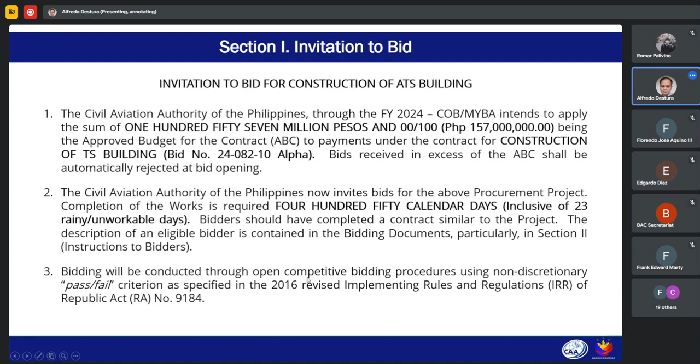Interested bidders may obtain further information from the Civil Aviation Authority of the Philippines BAC office and inspect the bidding documents at the address given below from 8 a.m. to 5 p.m., Monday to Friday. A complete set of bidding documents may be acquired by interested bidders on 16 October 2024 until the deadline of submission of bids, from the given address and websites below, and upon payment of the applicable fee for the bidding documents pursuant to the latest guidelines issued by the GPPB, in the amount of 50,000 pesos exclusive of any and all taxes imposed by relevant government agencies.

The procuring entity shall allow the bidder to present its proof of payment for the fees by presenting the official receipt in person. The Civil Aviation Authority of the Philippines will hold the pre-bid conference on October 22, 2024, 9:30 a.m. at the CAAP Conference Room, CAAP Compound, Mia Road, Ninoy Aquino Avenue, 1300 Pasay City, Metro Manila, and/or through video conferencing or webcasting via Jitsi, Zoom, or Google Meet, which shall be open to prospective bidders.

Bids must be duly received by the BAC Secretariat through manual submission at the office address as indicated, on or before November 5, 2024, 9:30 a.m. Late bids shall not be accepted. All bids must be accompanied by a bid security in any of the acceptable forms and in the amount stated in ITB Clause 15. Bid opening shall be on November 5, 2024 at 9:30 a.m. at the given address below and/or via Jitsi, Zoom, Google Meet.

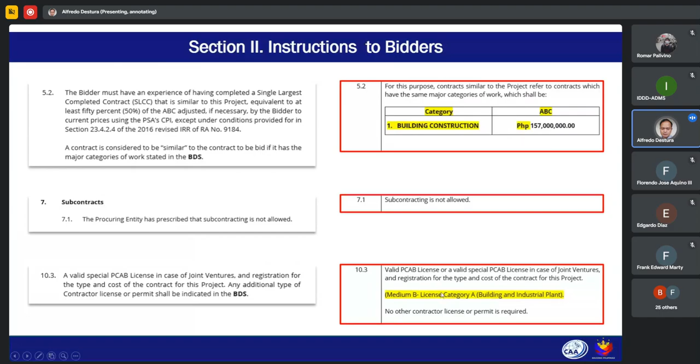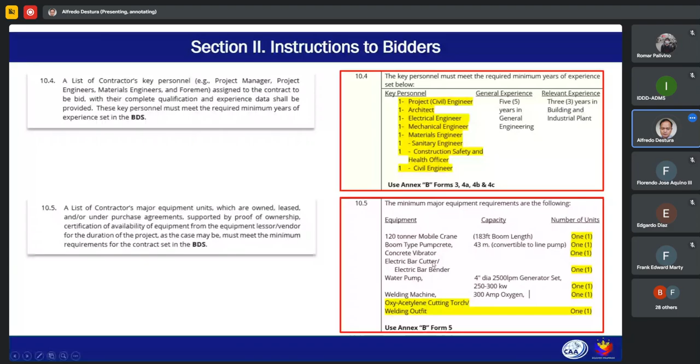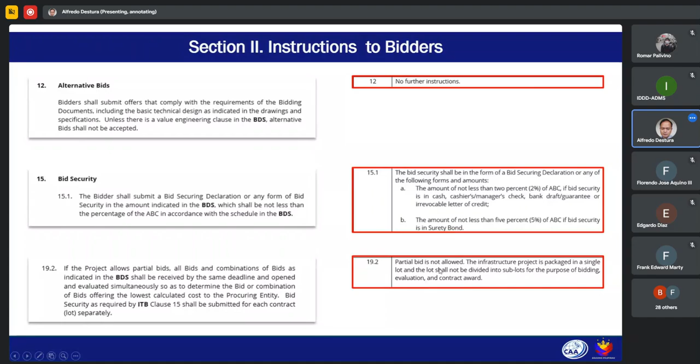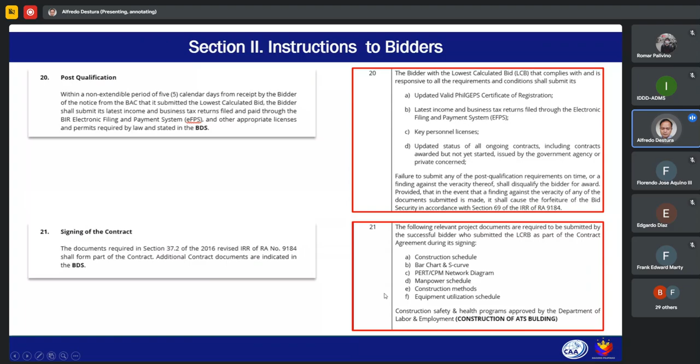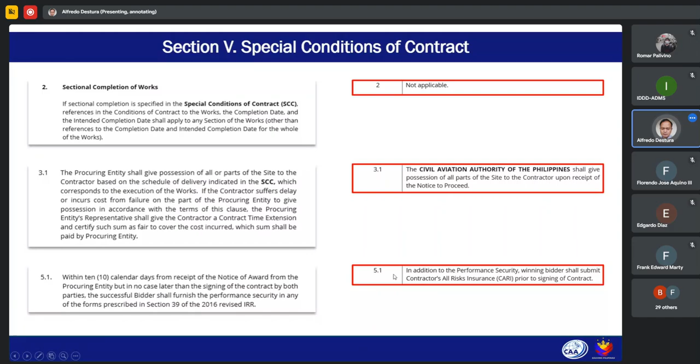In addition to the performance security, the winning bidder shall submit a contractor's all risk insurance or CARI prior to signing of the contract.

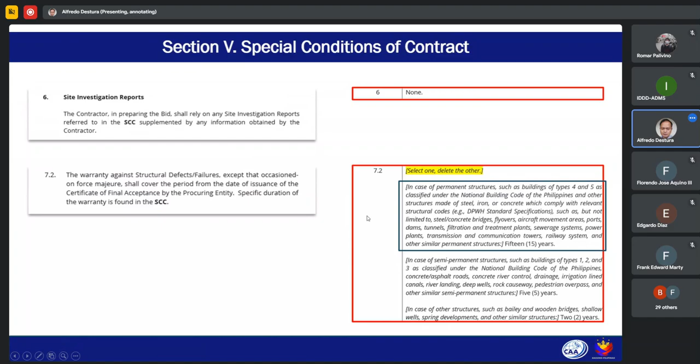Day works: no day works are applicable to the contract.

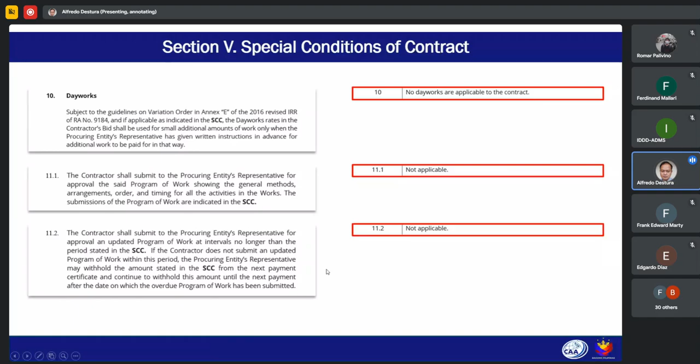Item 11.1, not applicable. Item 11.2 is also not applicable.

On advance payment, the procuring entity shall, upon written request of the contractor, which shall be submitted as a contract document, make an advance payment to the contractor of an amount not exceeding 15% of the total contract price, to be made in lump sum or at most 2 installments according to a schedule specified in the SCC, subject to the requirements in Annex E of the 2016 revised IRR, RA 9184. The amount of the advance payment shall not exceed 15% of the total contract price.

Other progress payments: no further instruction for this.

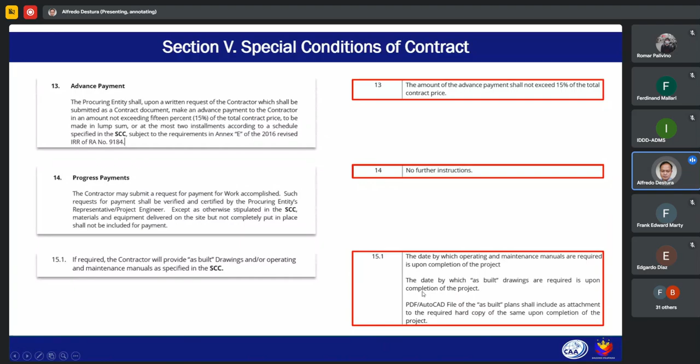If required, under item 15.1, the contractor will provide as-built drawings and/or operating and maintenance manuals as specified in the SCC. The date by which operating and maintenance manuals are required is upon completion of the project. The date by which as-built drawings are required is also upon completion of the project. A PDF AutoCAD file of the as-built plan shall be included as an attachment to the required hard copy of the same upon completion of the project.

Under 15.2, if the contractor does not provide the drawings and/or manuals by the dates stated above, or they do not receive the procuring entity's representative's approval, the procuring entity's representative may withhold the amounts stated in the SCC from payments due to the contractor. The amount to be withheld for failing to produce as-built drawings and/or operating and maintenance manuals by the date required is 2% of the contract price.

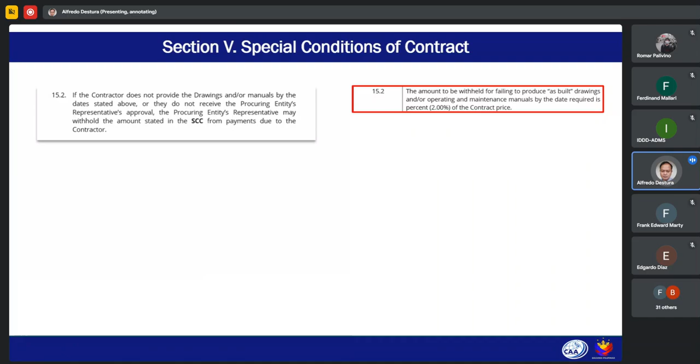Under the scope of work for the construction of the ATS building, the project covers the supply of labor, materials, mobilization, demobilization, tools, equipment, and construction-related permits necessary for construction of the ATS building at CAAP head office, with the following scope of works which shall be done in accordance with the approved plans, specifications, and provisions of the contract.

The details of work are best enumerated below, but be noted that the contract includes all works and services, although not specifically mentioned herein, but are needed to fully complete the project. The scope of works are the following.

The scope of work includes all incidentals necessary to complete the work in accordance with the contract documents, but is not limited to the following: generals and preliminaries, drawings, specifications, bill of materials, temporary facilities, site requirements, earthworks, structural works, masonry works, architectural works, painting works, doors and windows, plumbing and sanitary works, electrical and electronic works, mechanical works, fire protection, furniture, materials handling, keeping and warehousing, labor and manpower deployment.

The work shall be done all in accordance with the approved plans and specifications, subject to the terms and conditions of the construction contract and the general conditions, which shall have supplementary effect.

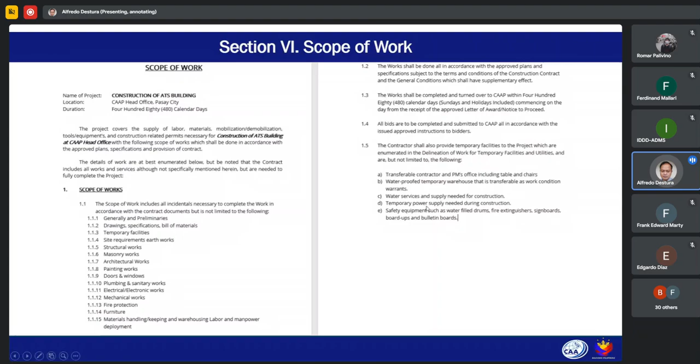A soft copy of plans and drawings will be provided to interested bidders. The bill of quantities instructions are provided in section 8 of the bid documents. The checklist of the technical and financial documents are shown and also included in the bid documents.

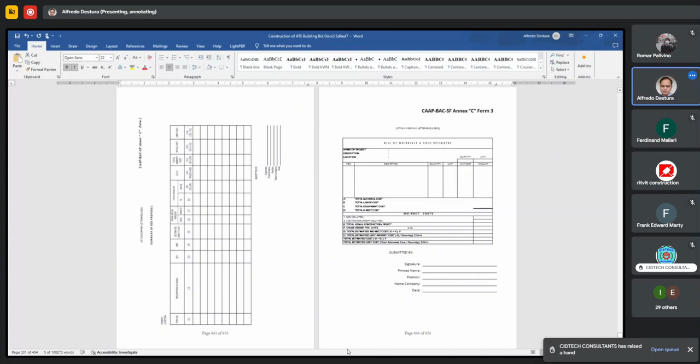Upon review po namin, iba po yung format niya sir. Susundin na lang po natin yung as an example doon sa naunang pakita ko lang. Sige po sir. Parang nasa page 330 po sir. Yes sir. Ito po, nakikita niyo po ba? Yes po sir, ito kung ano nandito, dito na lang po susundin natin.

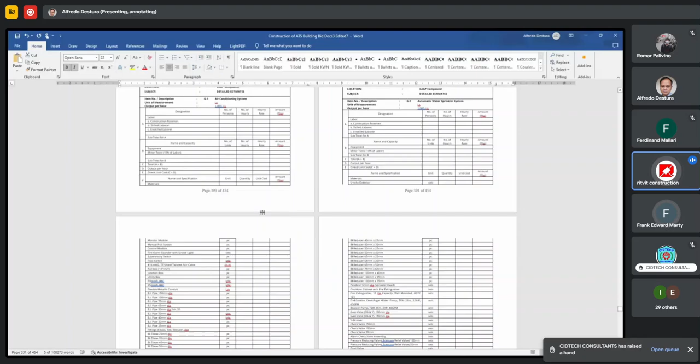Okay po sir, okay lang po ba sir, ano rin po to sa, if ever po is may bid bulletin? Kasi ang nakalagay po sa checklist is form Annex C na yun po yung nasa kabila. Yes po sir, we will be issuing a bid bulletin to clarify this item po. Okay po sir, thank you po sir.

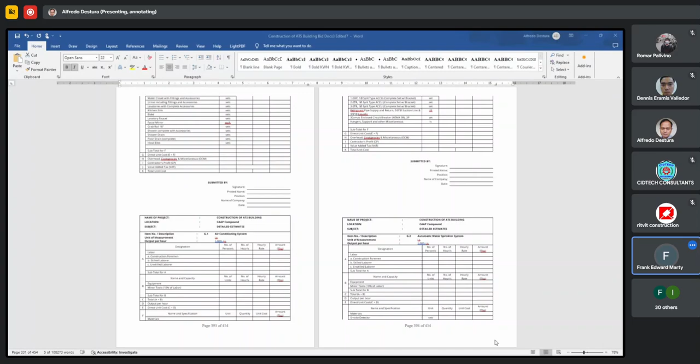Any other questions? If there is none, we would like to remind our prospective bidders that you can still raise your questions or submit your clarifications 10 calendar days before the opening of bids. So if wala na po, we can now officially close the pre-bidding conference for the construction of ATS Building.

Oh, mayroon pong pahabol ata si CIDTECH. CIDTECH, yes po sir. Sir, may additional question ako. Yes po. Regarding sa site visit, kailangan pa ba kami mag site visit? Or kailangan ba ng site certificate of site visit?

Sir, kasama po siya sa mga post-qualification documents. It is not included, sir, in the checklist of requirements during the opening of bids, but this will be required during the post-qualification submission kung halimbawa kayo po yung lowest calculated bid. Okay sir, thank you sir.

You're welcome po. So with that, we can now formally close the item for the pre-bidding conference of construction of ATS Building. Again, thank you to all our prospective bidders for joining the pre-bidding conference, and we look forward to your submissions po. Maraming salamat po, and you may now leave the meeting room po.

Mr. Chair, we now proceed, sir, with the pre-bidding conference. This is for the construction of runway turnaround pad and continuation of strip grade correction at Zamboanga International Airport. This is a rebid with a bid number 24-41-06 Alpha with an ABC of 69,675,369 pesos and 51 centavos.

All right, sige, let's proceed. Thank you, Mr. Chair. ADMS please. ADMS, you may now share your screen and start your presentation. Okay sir, let me share my screen sir.

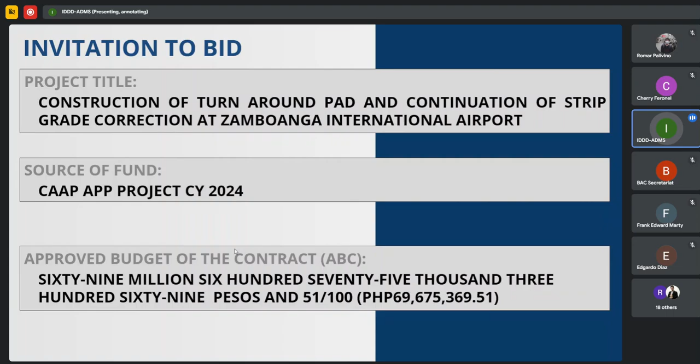These are the minimum technical personnel required for the project and the minimum major equipment requirement for the project. The required PCAB license is a medium A license, category B, road, highway pavement, railways, airport, horizontal structures, and bridges.

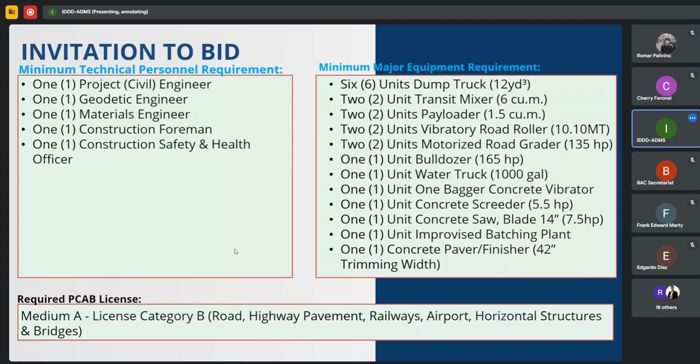The duration of the project is 210 calendar days, inclusive of 11 rainy or unworkable days. The applicable fee for the bidding documents is 56,000 inclusive of 12% VAT.

The submission of bidding docs shall be on November 7, 2024 at 9:30 a.m., as well as the opening of bid.

Under the bid data sheet, ITB clause 5.20, for this purpose, contracts similar to the project refer to contracts which have the same major categories of work, which shall be concreting of roads or other horizontal structures with the ABC of 69,675,369 pesos and 51 centavos.

For ITB clause 7.1, subcontracting is not allowed. For item 10.3, the valid PCAB license or a special PCAB license in case of joint ventures and registration of the type and cost of the contract for this project is a medium A license, category B, road, highway pavement, railways, airport, horizontal structure and bridges. No other contractor license or permit is required.

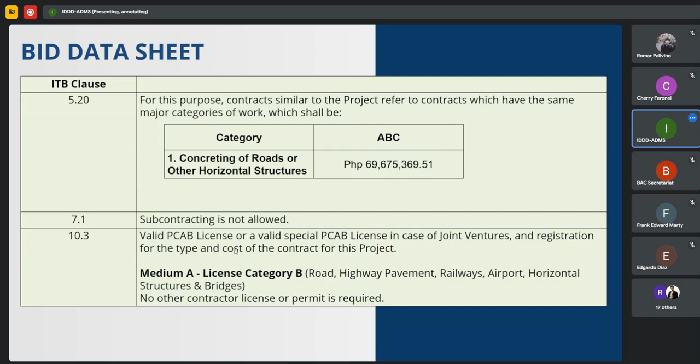Item 10.4, these are the key personnel must meet the required minimum years of experience set below: 5 years in general engineering and 3 years in concreting of roads or other horizontal structure. For item 10.5, again, these are the minimum major equipment requirement for the project.

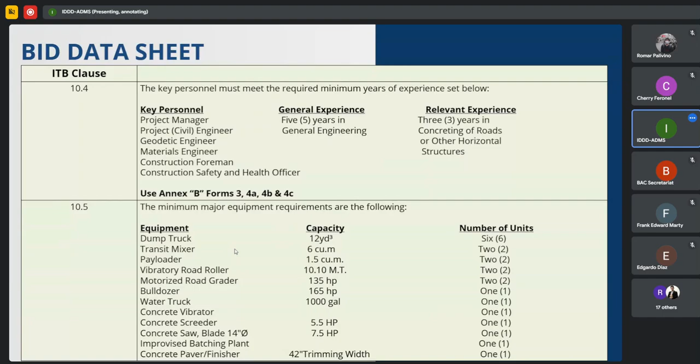ITB clause 15.1, the bid security shall be in the form of a bid securing declaration or any of the following forms and amounts: the amount of not less than 2% of ABC if bid security is in cash, cashier's or manager's check, bank draft, guarantee, or irrevocable letter of credit, and the amount of not less than 5% of ABC if bid security is in surety bond.

Item 19.2, partial bid is not allowed. The infrastructure project is packaged in a single lot, and the lot shall not be divided into sublots for the purpose of bidding, evaluation, and contract award.

For item 20, the bidder with the lowest calculated bid that complies with and is responsive to all the requirements and conditions shall submit the following: updated valid PhilGEPS certification or registration, latest income and business tax returns filed through the electronic filing and payment system, the key personnel licenses, updated status of all ongoing contracts, including contracts awarded but not yet started, issued by the government agency or private concern.

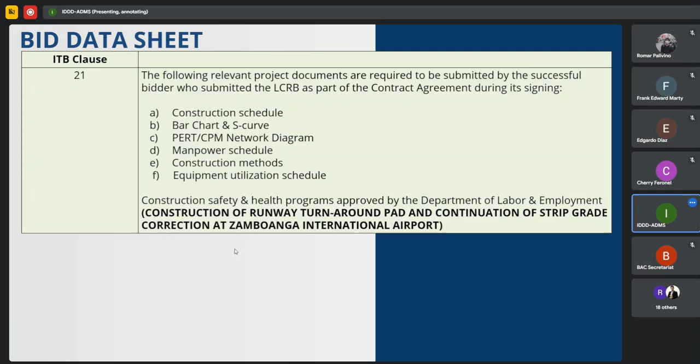Under the special conditions of contract, GCC clause number 5, in addition to the performance security, the winning bidder shall submit contractor's all risk insurance or CARI prior to signing of contract. Item number 13, the amount of the advance payment shall not exceed 15% of the total contract price.

For item 15.1, the date by which operating and maintenance manuals are required is upon completion of the project, with the date by which as-built drawings are required also upon completion of the project. The PDF or AutoCAD file of the as-built plan shall be included as attachment to the required hard copy of the same upon completion of the project.

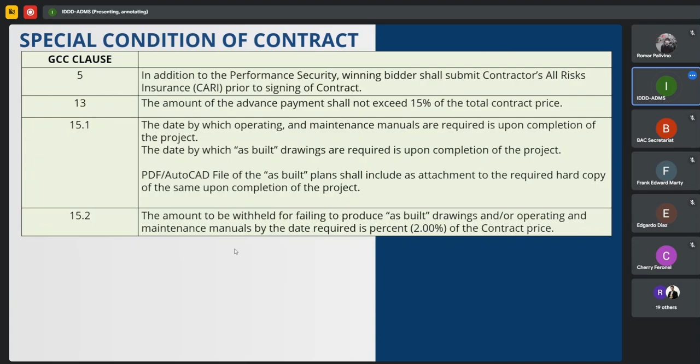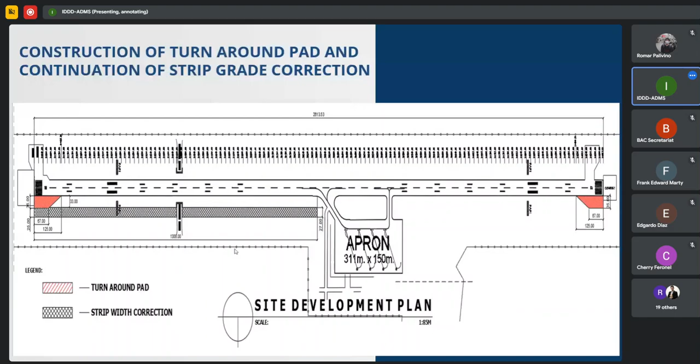This is the typical section for the turnaround pad, and also the typical section view for strip width correction.

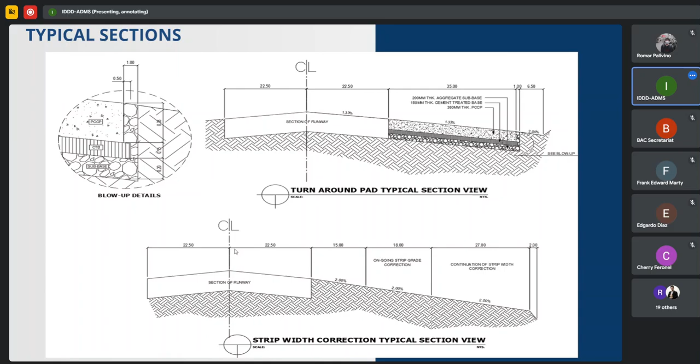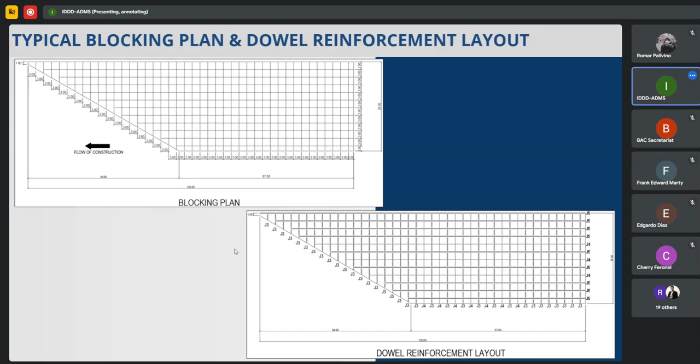This will be the typical blocking plan and the reinforcement layout for the turnaround pad. Also included in the scope of work is the provision of runway edge lights and turning pad lights layout.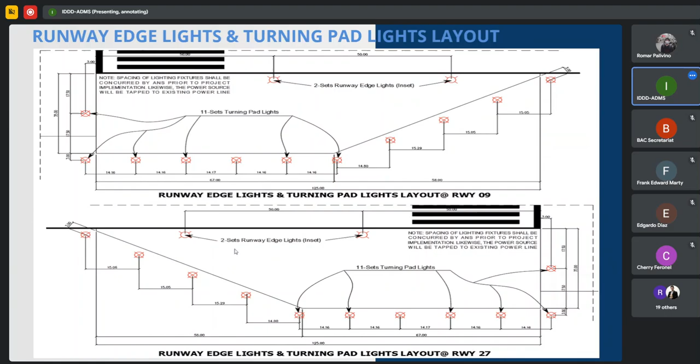Also included in the scope of work of the project are the turnaround pad markings.

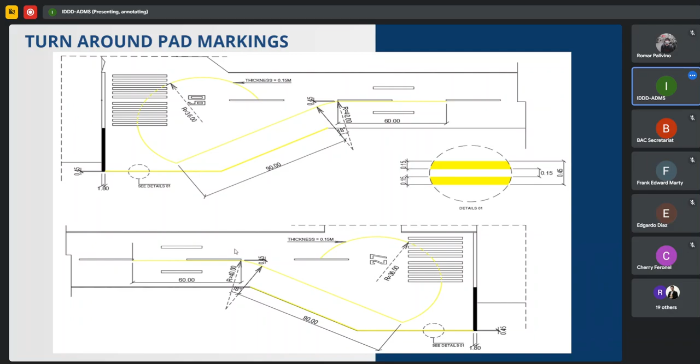For the scope of work of the project, we have mobilization and demobilization. We also have temporary facilities, which include the staff house and service vehicle. We also have the construction safety and health program, reinstallation or replacement of runway edge light, and installation of turning pad lights.

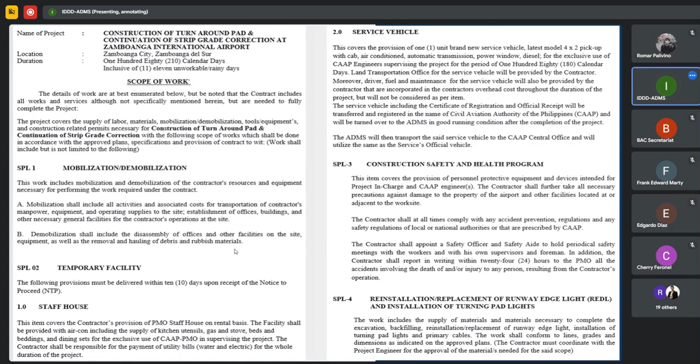Under construction of turnaround pad, we have excavation and disposal, aggregate sub-base course 20 mm thick, cement treated aggregate base course 150 mm thick, Portland cement concrete pavement 380 mm thick, and turnaround pad markings.

Under the continuation of strip grade correction, we have the excavation and disposal and embankment. This also includes the scope of work, which is the general provision of the project.

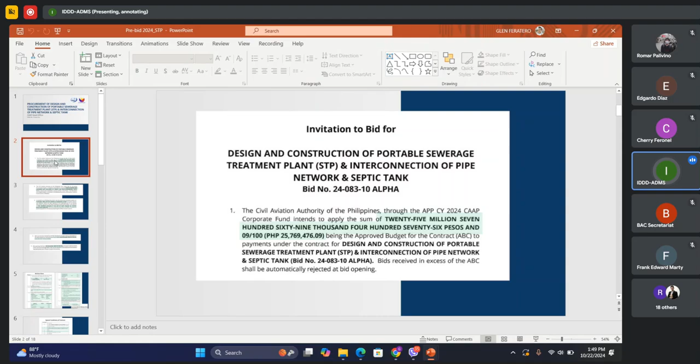The source of fund of the project is from APP CY 2024, CAAP Corporate Fund, with an ABC of 25,769,476 pesos and 9 centavos. The duration of the project is 300 calendar days, inclusive of 20 rainy or unworkable days.

A complete set of bidding documents may be acquired by interested bidders on October 16 until the deadline of submission of bid. The applicable fee for the bidding documents is 25,000 pesos, exclusive of any and all taxes imposed by relevant government agencies.

Bids must be duly received by the BAC Secretariat through manual submission at the office as indicated, on or before November 5, 2024 at 9:30 a.m. Bid opening shall be on November 5, 2024 at 9:30 a.m.

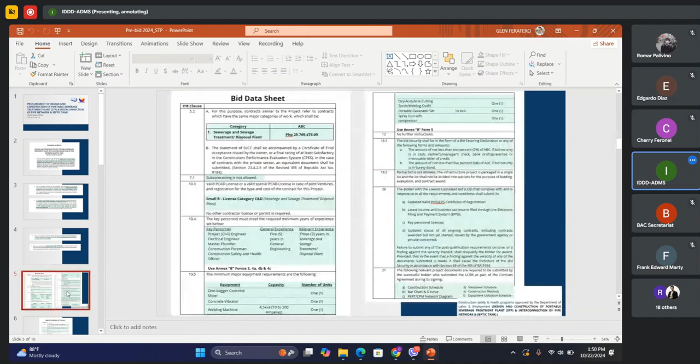Under ITB Clause 5.2, for this purpose, contracts similar to the project refer to contracts which have the same major categories of work, which shall be sewerage and sewage treatment or disposal plant. For this project, subcontracting is not allowed.

Under ITB Clause 10.3, the required valid PCAB license, or a valid special PCAB license in case of joint ventures, is small B license category C and D, sewerage and sewage treatment or disposal plant.

The required minimum years of experience for the key personnel must be 5 years in general engineering and 3 years in sewerage and sewage treatment or disposal plant.

The minimum major equipment requirements are the following: 1 bagger concrete mixer, concrete vibrator, welding machine, oxyacetylene cutting torch welding outfit, portable generator set, and spray gun with compressor.

Under ITB 15.1, the bid security shall be in the form of a bid securing declaration, or any of the following forms and amounts: not less than 2% of ABC if bid security is in cash, cashier's or manager's check, bank draft or guarantee, or irrevocable letter of credit; or not less than 5% of ABC if bid security is in surety bond. Partial bid is not allowed.

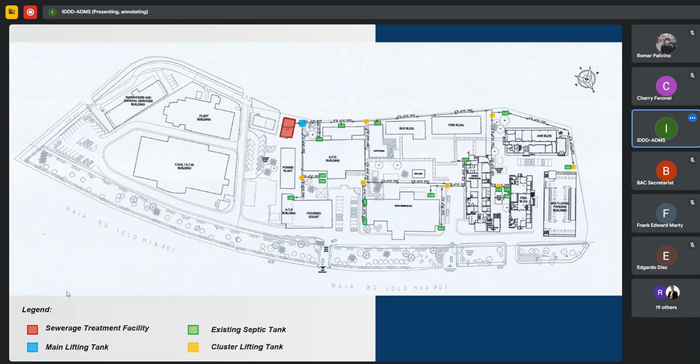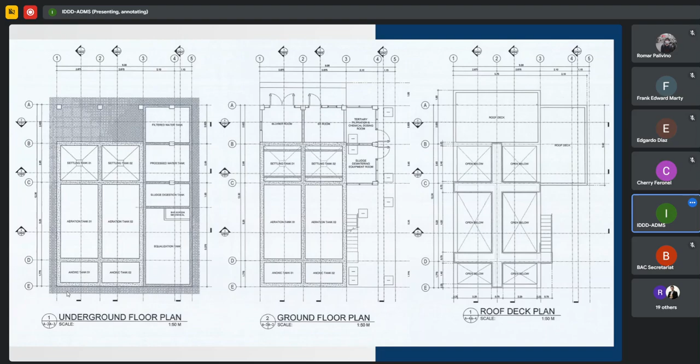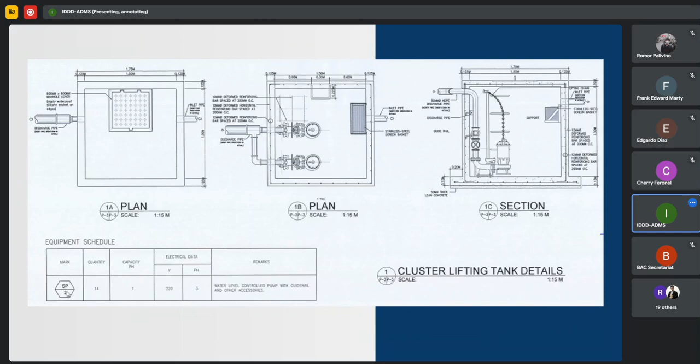This is the spot details of the cluster lifting tank. For this project, we have 7 cluster lifting tanks. And this is the detail of the main lifting tank; we have 1 main lifting tank for this project.

This is the process of the sewerage treatment plant. So we have the equalization tank, then anoxic tank, aeration tank, settling tank or clarifier, then WAS digestion tank, MDS press, processed water tank, multimedia filter tank, chlorine dosing system, and filtered water tank.

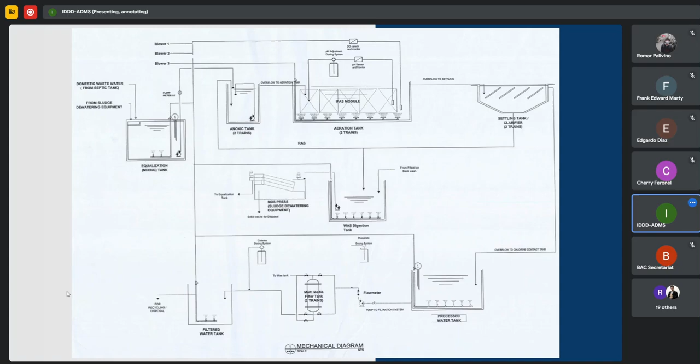For the scope of work, we have 3 items: general requirements, sewerage treatment facility, and interconnection piping and lifting tanks. Under general requirements, we have mobilization, demobilization, occupational safety and health program, and project billboard or signboard.

Under sewerage treatment facility, we have civil and structural works, and site works. We have a total volume of excavation of 248.12 cubic meters. For backfill, 2.25 cubic meters. For gravel bedding, 9 cubic meters.

Under concreting works, total volume is 123.50 cubic meters. Masonry works, including plastering, total area of 34.62 square meters. Steel works, total weight of 1,484.06 kilograms. For waterproofing, total area of 427.77 square meters.

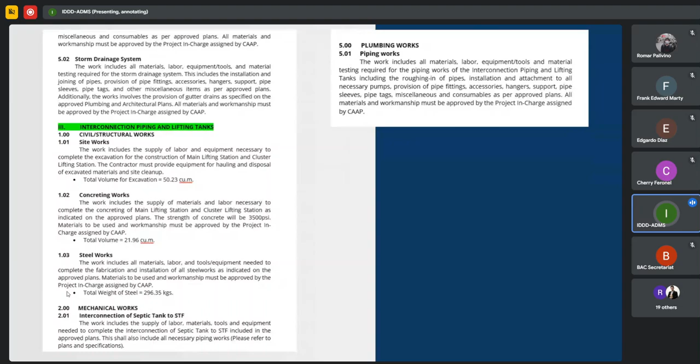And for mechanical works, we have supply of labor, materials, tools, and equipment for the interconnection of septic tank to STF. Last, we have plumbing works, including piping works. For the general provisions of the project, provisions for staff house, service vehicles, laptops, printers, cameras, plotters, furniture, and other materials, devices, and equipment under special item or temporary facilities shall not include OCM and contractor's profit.

The contractor shall be responsible in providing safety perimeter fence or security fences, personal protective equipment for staffs and workers on site while construction is ongoing.

Safety reports should be prepared regularly. The contractor shall be responsible for all laboratory, material testing, building and safety permits and survey instruments necessary in the project implementation. These expenses shall be incorporated in the contractor's overhead costs and shall not be considered as pay item.

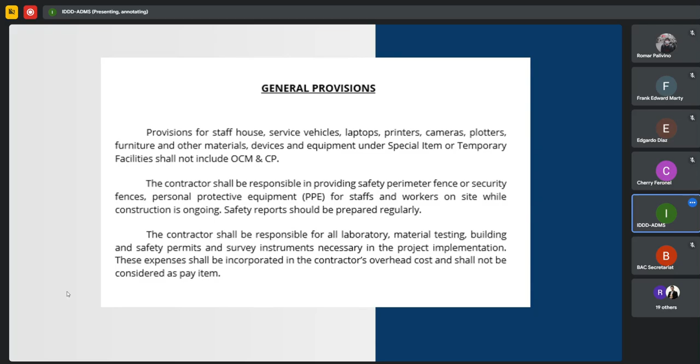That's the end of my presentation. Thank you.